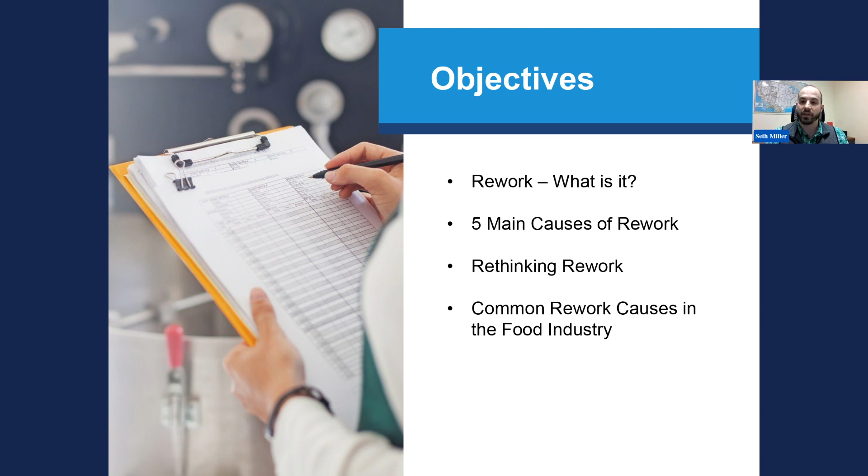So rework, what is it? Rework is really just a general term given to any unincorporated or unused product within a food manufacturing process that's going to require additional work or processing to make that product sellable for you. There are infinite causes of rework, but they can be lumped into 5 main groups.

First being issues with supplies or ingredients, so supplier-related holds that could cause rework for you. Second, any innate rework to a manufacturing process, or something that is a natural part of the process. Third would be a mechanical failure or malfunction of equipment that could potentially put foreign material over a product contact surface. Going fourth, more generally, foreign material found in the product could be anything outside of the mechanical break realm. And then finally, a failed or missed quality check that would result in needing to rework the product back through the quality system.

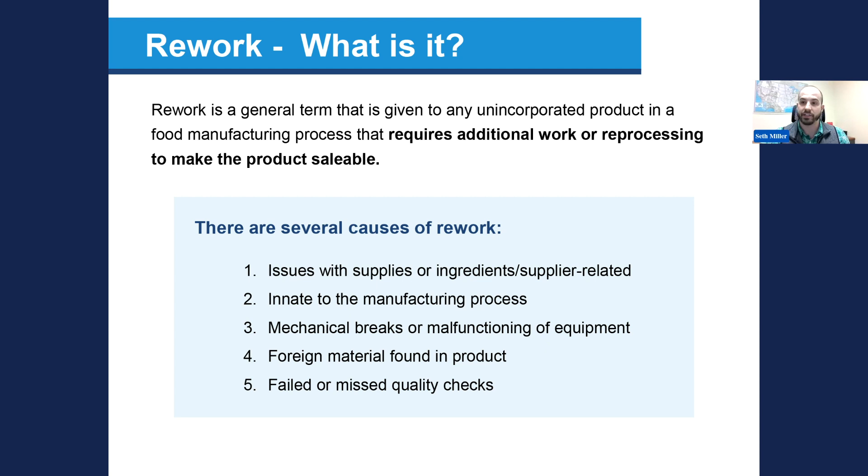So moving right into it, the 5 main causes of rework with more detail. A supplier-caused rework or hold, this could be due to any ingredient or packaging material that is out of spec or contaminated. So this could be very easily solved if you were notified right away. Where the concern comes in is if you weren't notified right away and you found out that you had out-of-spec material from your supplier after you already used the supplies or ingredients. So what would you do then?

Second, talking about rework that is a natural part of the manufacturing process. This is rework that's just part of the process, something you're dealing with day in and day out. Depending on what the product is and what you're making will really determine the outcome of this style of rework. Given the example of utilizing a slicer in the meat industry, where you have a gripper that grabs the butt end of the loaf and then feeds it to the slicer, you have a good chunk of meat left over that turns into rework. That same thing happens within the cheese industry with that same piece of equipment. But in the cheese industry, that rework is very easily consumed in shredded cheese or able to melt back into the process.

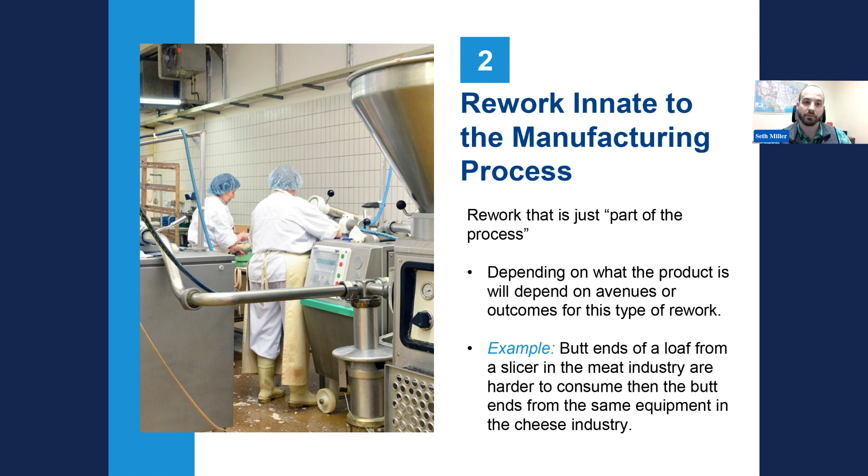Whereas in the meat industry, it's much harder to use. Third, let's talk about mechanical and equipment failures. So when a piece of machinery breaks and could potentially put foreign material into your product,

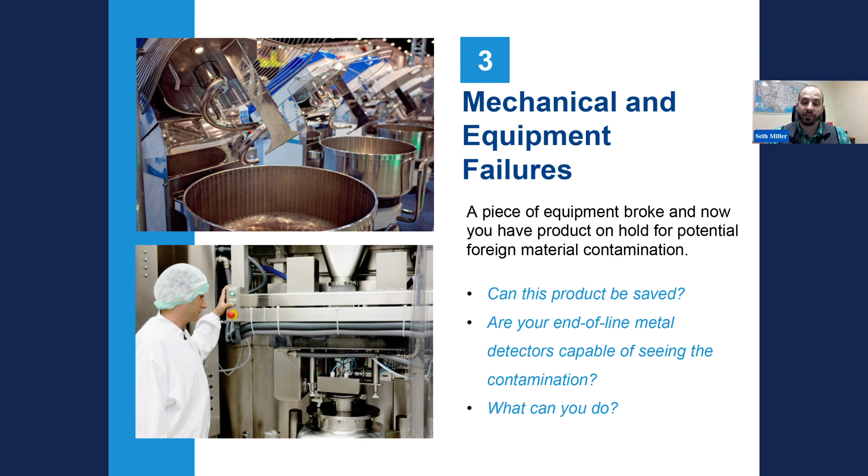how can this product be saved? Do you have end of the line detection? Is it possible to see all of the contaminants that could be in your product? If so, what is the detection level? And what do you do next?

Moving on to the fourth category of foreign material, there are countless sources of foreign material outside of mechanical failures for all of our processes. It can be from human error to just anything from packaging materials getting into your product. So think of human error or tools being left online, as well as PPE gone broken or missing, bone from protein processing being left in something that is considered boneless, or think about glass in the bottling industry.

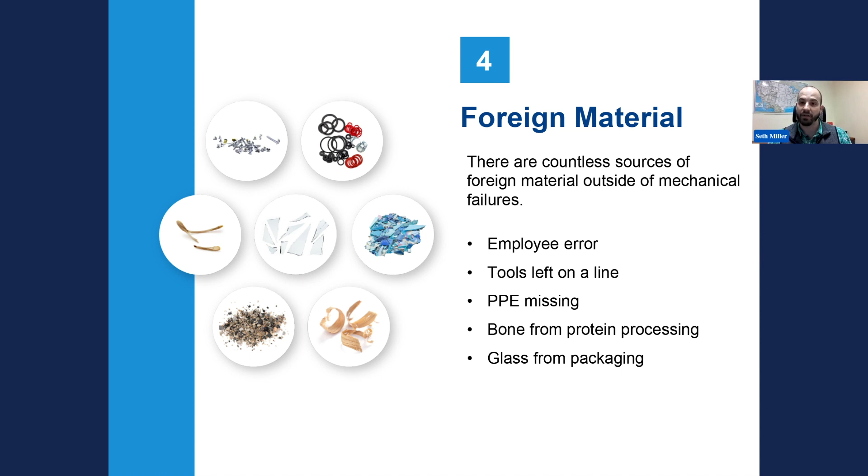If one of the bottles breaks, how do you verify that there's not glass in any of the surrounding containers?

Then the last category we like to talk about today is going to be failed or missed quality checks. A failed or missed quality check can result in many things, but mostly it'll result in a hold for you, on which the product will need to be reworked or at least rechecked to validate that your process is safe. So if it's a CCP failure within your HACCP plan, very serious hold that will require it to be ran back through the CCP if possible.

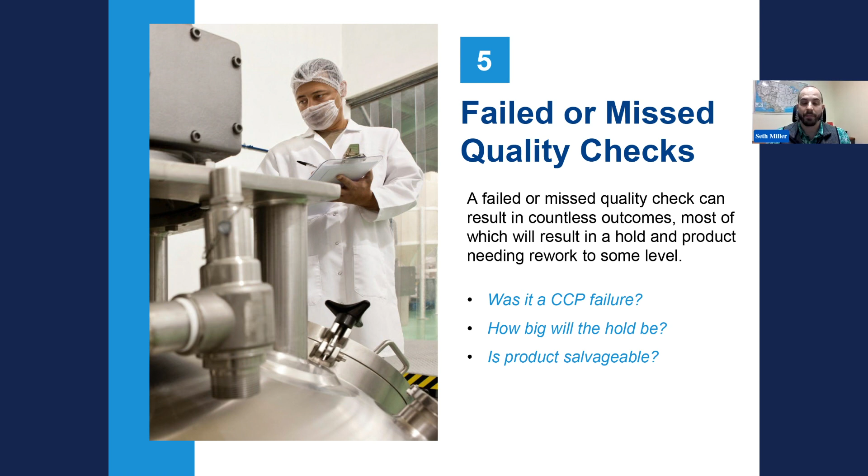Finding the bookends on this and determining how big of a hold might be easier than any of the previous examples we talked about, being that you can go from good check to good check, but then understanding what is your risk and if the product is salvageable.

Next, I would like to turn it over to Suzanne to talk about rethinking rework and the process of foreign material. Thanks, Seth. You did a great job of setting that up, all the reasons why we might do rework. But as Joe mentioned in the intro, we're going to focus today on foreign material, which is certainly cause for concern for all of us in our various industries.

So before we really get into the meat of the rework, let's level set on a little bit of terminology. So there's two reasons why we might find ourselves in a foreign material situation. The first one is an event.

This is exactly what it sounds like. Something happens in the process. Likely it's a known something that causes concern that you might have introduced a contaminant into the product. Examples of this might include some type of malfunction. Maybe you've ground something up in your process, lost personal protective equipment. It could be any one of a number of things.

The alternate is a simple finding. And so this is when foreign material is just simply discovered in the process. It's, I like to call it, it's either a stumble on or an I spy type of situation where you found something in your product, or maybe your customer has found something in your product.

We've got, of course, a variety of exclusion devices in most of our processes. And so I would say when you have a finding at that exclusion device, it's not necessarily indicative of an event. It's not necessarily indicative of a finding. It may just be that that's why you have it in place to collect any incidental things that pass through your process for whatever reason. It's functioning as it's supposed to.

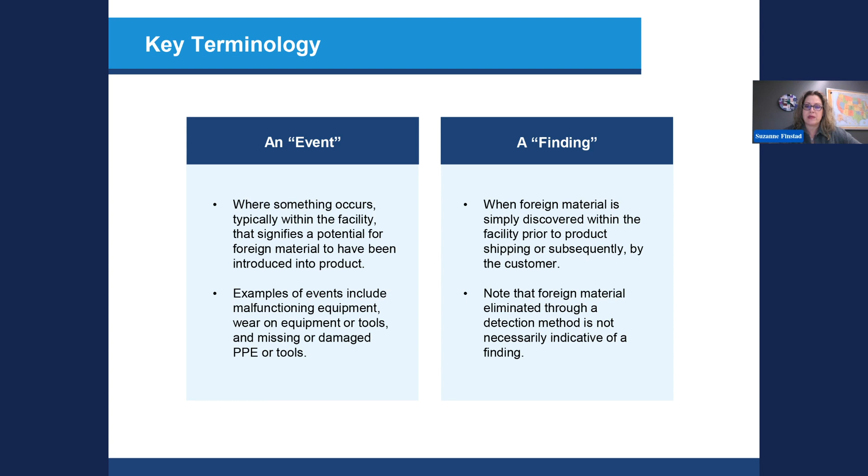However, recognize that there's a crossover point where you have enough of those little findings that may indicate to you that you're in the middle of an event. And so when we think about we've had an incident, whether it's an event or a finding, what makes the difference between spiraling out of control, maybe getting into a really public, unfortunate event for our companies, or good control of the situation, it's really how you respond in the moment. So we're going to spend some time talking about that.

So the first thing that you want to do is control the product. And I'd recommend that you cast a wide net, you may want to overkill on this one. It's certainly much easier to release product on the back end than it is to try to get your arms around stuff that's gotten away from you.

So that's number one. You also, if you don't know what the cause of your situation is, you want to consider all of the components of the product. So anything that went into it, whether that's food or whether it's not food, may be a source for the situation that we have. Consider all of the possibilities, which might include missing tools, parts, personal protective equipment, the unfortunate intentional act.

We hope that doesn't happen, but it's a possibility in our businesses, whether it's an isolated finding or a systemic situation. Lotting really is the key to this, because you want to make sure you've captured enough material to really contain the problem.

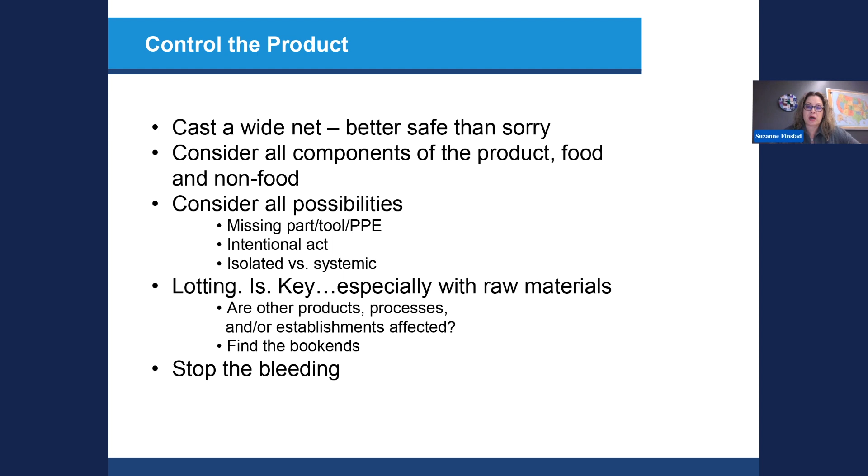And then you really want to find the bookends. When did this start? When did this stop? And stop the bleeding. You want to really recognize the danger in continuing to produce suspect product. You're really just compounding your problem at that point.

Diving deeper into finding the bookends and how we might do that, you first need to consider whether you know when the incident occurred or when it could have occurred. Timing is important. What do you know versus what do you not know? And what might be able to help you know what you know?

Could you use video monitoring? Is that available where you can go back and review the process and determine exactly what happened? Do you have equipment checks that you can refer to that would tell you what that equipment's integrity was and when? Maybe employee interviews - I promise you, no one knows more about what's going on the processing floor than the people actually doing the work.

Think about your process timing, start to finish, whether you're batching, cleanup to cleanup, whatever that looks like for you. You want to know how long it takes for material to flow through your process so that can help you capture what the affected lot might be.

And then consider any catch or collection points, because we're talking today about something that happens in the moment and the rework associated with that. But you might have rework for different reasons coming off your process at any point in time, and you don't want to let that get away.

And then if all else fails and you don't know, if you can't answer any of the above questions, back to the last acceptable check is always a pretty safe bet.

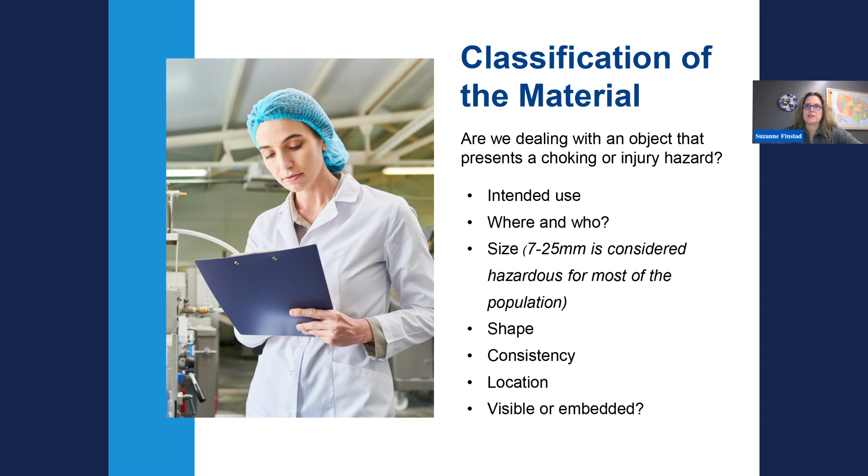The main thing here is really to emphasize the importance of keeping control of any hazardous material and then applying the appropriate response or disposition to that material. When we think about the disposition, this is really the third component of the response.

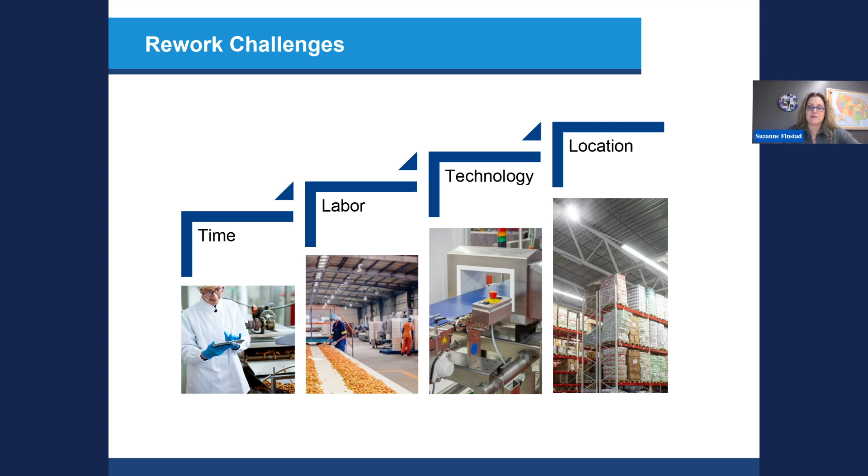Let's take a deeper dive into each of these, starting with time. So you have this rework - I would guess that most of our businesses, I know mine does, runs off of a production schedule. We have orders that we're working to, we know what we're trying to produce, and someone is determining when we're going to produce those things. It typically doesn't account for time baked in for us to start over and retry something that we've already produced.

Additionally, thinking about our customer expectations, I know most of my customers have expectations that the product they order is going to be delivered on time in full. So we disappoint our customers when we can't meet that schedule. Factored into both of those things, what's the reasonable speed that you can conduct this rework in your facility, in consideration of whatever that production schedule is, paired up with the customer expectations for when they're going to receive the product. So that's number one, time.

That takes us to labor, being the next piece. How complicated is this rework process going to be in your location? Let's assume you've got the ability to do it, maybe in-house - how complicated is it going to be? Do you have the labor to do it? Back to consideration of that production schedule, if the answer is we'll have to do this rework over the weekend, 6th and 7th day work, whatever that is outside the schedule, then what's that cost going to be? And is the juice worth the squeeze to try to rework it yourself?

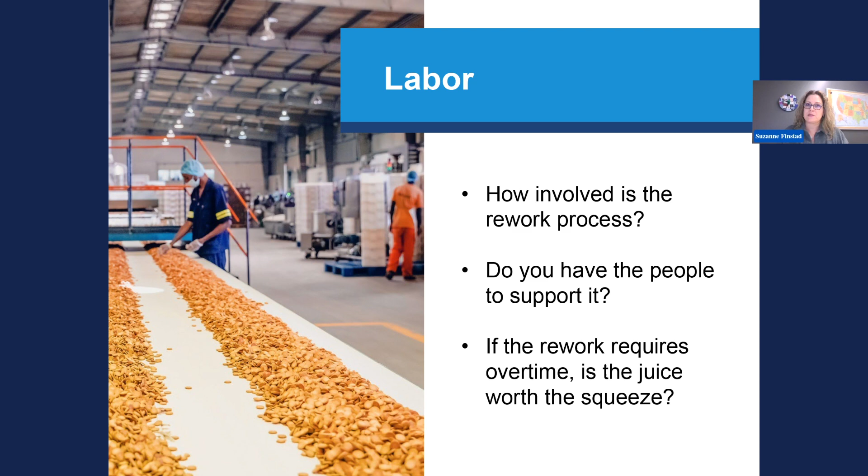Next piece would be technology. When we talk about technology, we're obviously assuming that you're not going to go with manual screening or sorting, reliant on the human eye. There are a lot of possibilities there.

Maybe you've got magnets, filters, screens, metal detection, hyperspectral imaging, X-ray. I think the important consideration here is what are you looking for, and what's the ability of whatever you're using for that technology to detect what that thing is. So just because you've got this technology online, there are a whole lot of factors that influence detectability of materials, and all of those need to be followed up on to make sure that what you're trying to do will actually accomplish the end result.

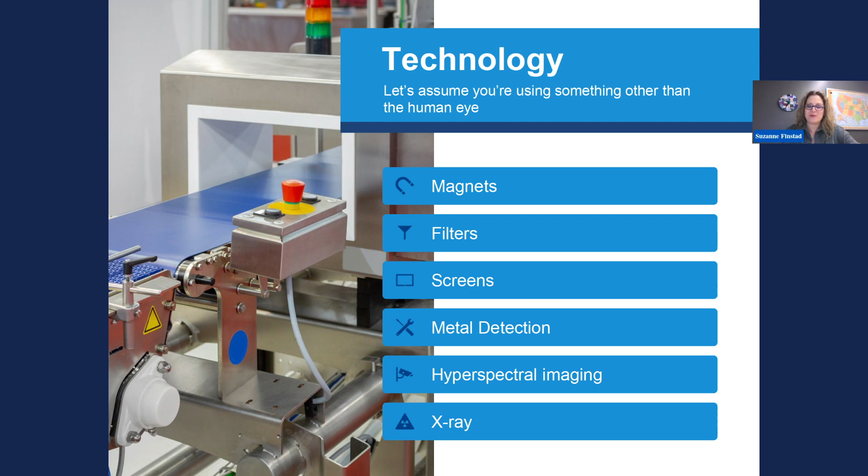We could probably spend a whole other hour talking about those specifics, but we won't belabor that here. Just know that that's an important piece that you need to follow up on. And then finally, location.

So where does this product physically sit? And how easy is it for you to get your arms around it to rework, assuming you're able to, or send it to a third party? Can it be screened, sorted where it is, or does it need to be relocated somewhere else?

If it needs to be relocated, there's probably a cost benefit analysis that goes in there to help make the decision on what the right thing to do is. And then, of course, the pinnacle: what's your comfort level with your ability to keep your arms around the affected product while all of this is going on, and you're working through the rework.

And so with that in mind, we'll transition and talk through some examples of causes of rework. I'll pitch it back over to Seth. All right, thank you, Suzanne.

Now we're going to talk through some common rework causes within the food industry, with an emphasis on foreign material.

So in order to talk foreign material, let's talk about metal detection and a metal detection failure, to be more specific. Metal detectors are a very important part in most HACCP plans. They're the end-of-line CCP for most lines within the food industry. So whether it's a missed check or a metal detector failure, one thing can be certain for sure: you'll have

product on hold. With this failure, though, you'll have a pretty easy set of bookends. You know when your last good check was, and you know when your failure happened, pretty much instantaneously.

So what are the options that you have when you have a metal detector go down, or you missed a metal detector check? Most production facilities don't have an extra line just laying around, or an extra metal detector that they can wheel that product over to and run it through the extra line. So you've got to utilize the lines that you have.

So that means missed downtime, like Suzanne spoke about, potential delivery issues and being on time with orders, as well as constraining your labor. Another option that you might have, though, is a third-party detection service, where you could send your product to them and they could detect it for you, and then you can continue running on the lines that you have.

I think I would just add to this, Seth brings up an important point that most facilities don't have extra lines just laying around with metal detectors on them. So when you're considering what to do from a rework perspective, you want to make sure that you consider the sensitivity level and the size of the aperture in relation to your product, to make sure that you're doing the right thing, and it's equivalent to or better than what your normal setup is that missed on the first try.

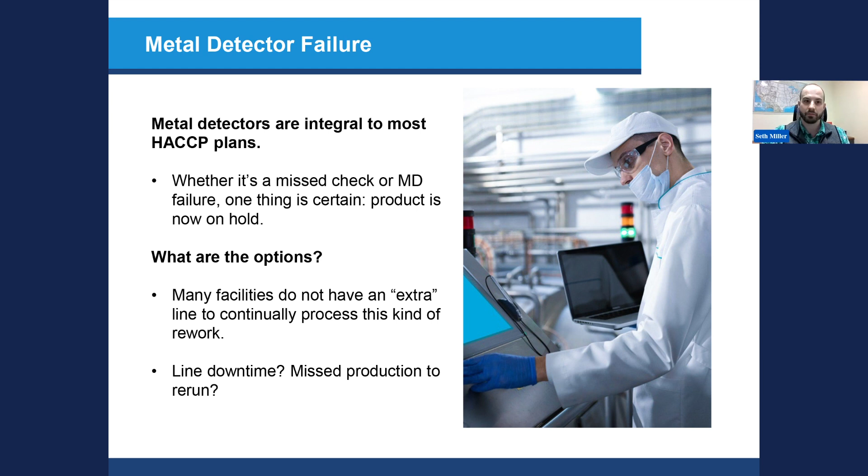Yeah, great point there. Thank you. Moving on to the next slide, let's talk about mechanical failures. Mechanical failures can lead to foreign material contamination and are definitely a growing concern within the industry as we continue to automate processes. You have more machines over your product contact surfaces than ever before.

So once a failure is noticed, let's use the example of a sifter screen being broken and pieces were found missing during a routine check. Once you've found this failure, you have to find your bookends, and you can use the procedure that Suzanne has outlined previously. You're going to assess your risk, and then you're going to create a hold. Once your hold is created, you've got to figure out how we're going to sort through your material to find the broken pieces of sifter screen.

You have a couple options. You can utilize your inline detection, whether that's an inline X-ray or metal detector, and hope that it's able to find all of the missing pieces. You, of course, can add labor and manually sift through that process and see if you can find missing pieces by hand, assuming that they haven't been mixed into the product and embedded.

Of course, you can always throw the product away and start over. Or third, you could utilize a third-party inspection service, so that way you're not taking line downtime or utilizing labor to do a manual sort.

Yeah, and I think the thing that I would add here is, if you're going to try to detect in-house or out of house for that matter, it's really important that you verify that in either case, the detection equipment you're utilizing can detect the thing that you're missing. I think it would be a bad idea to have blind faith in your detection equipment that it's capable of detecting the pieces at whatever size you're missing.

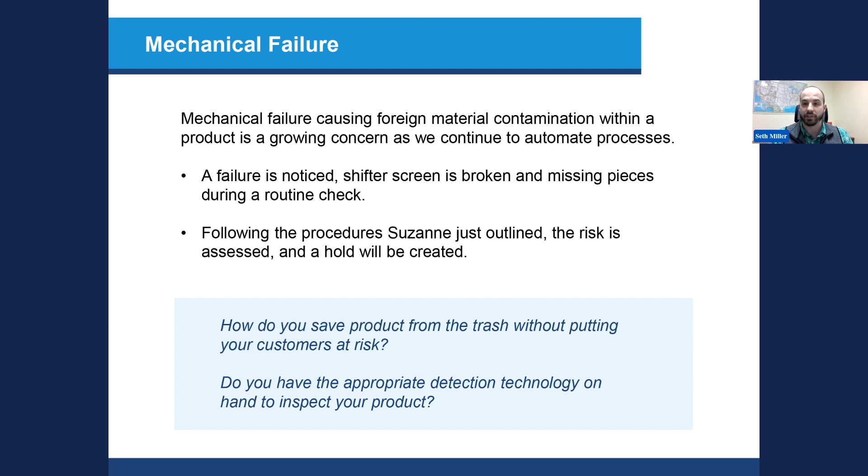Okay, jumping into foreign material, starting out with bone. Bone is not a foreign material from a USDA standard, but when we're talking about boneless meat products, it can present a risk to your customer and can lead to complaints. Bone can be introduced into the meat process at various points, starting with the deboning line. Whether you're utilizing automated deboning or you have personnel physically cutting the bone off the meat, if the blade nicks the bone, you can get some bone in your meat.

Moving on down the process to where you grind and utilize a bone elimination process, if your grind is set up incorrectly or you grind too much bone, sometimes it's too much for the bone eliminator to keep up with. And of course, lastly, if your machinery is not set up appropriately, you miss some plates putting them in, or have the wrong size grind plate in there, it could lead to bone being in your process.

So once you find bone in the product, how do you determine your bookends? Is the entire lot going to be on hold? And if so, what do you do to inspect for that material? As everyone knows, metal detectors do not detect bone. So what options do you have then? Can you do a manual sort? If it is large pieces of bone, that might be possible. Or can you utilize some sort of X-ray technology, whether it's in-house or third party?

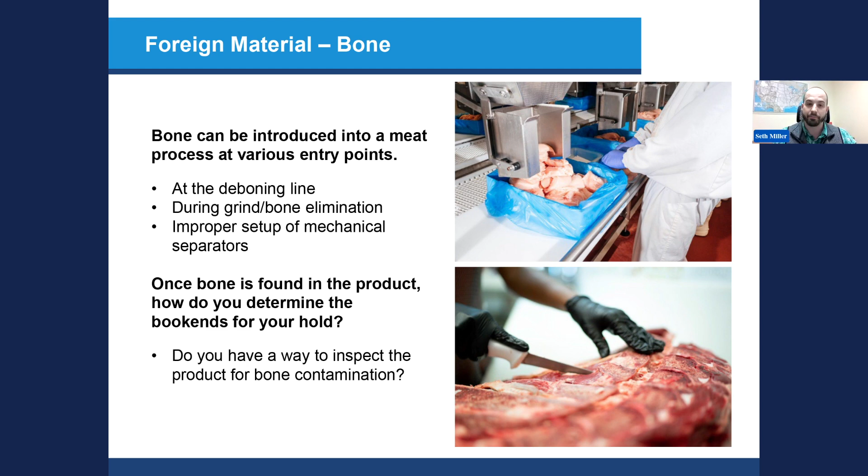Continuing on the vein of foreign material, talking about foreign material that's non-metal. Across the food industry, you have various entry points of non-metal foreign material within your process, whether we're talking about PPE from your operators, simple safety glasses breaking or gone missing, to rubber belting or scraper blades that are an integral part of your process. Each industry can be loaded with a lot of things that the standard metal detector cannot detect.

So when you come across these things, how can you find them when you know you have a foreign material issue that's not metal detectable? First portion would be just manual labor. Can you get people involved to sort through your product to see if you can find this foreign material, or do you have to trash it? What other options do you have? X-ray technology is growing and becoming better, so some of these things can be found through X-ray technology, whether it's in-house or with a third party.

Yeah, and I think I would just reiterate one more time the importance of making sure the equipment you're using is capable of detecting whatever you're looking for. The other thing I would add is just a caution with people doing the rework, because people all come with attention spans that may or may not be very long. Even the most attentive person kind of glosses over after a period of time looking at what feels like the same thing. Maybe there's also a method of, whether you can feel it in handling the product, if that's even possible. But there's a lot of pitfalls in here. The main thing would be, can you actually detect whatever it is that you're looking for?

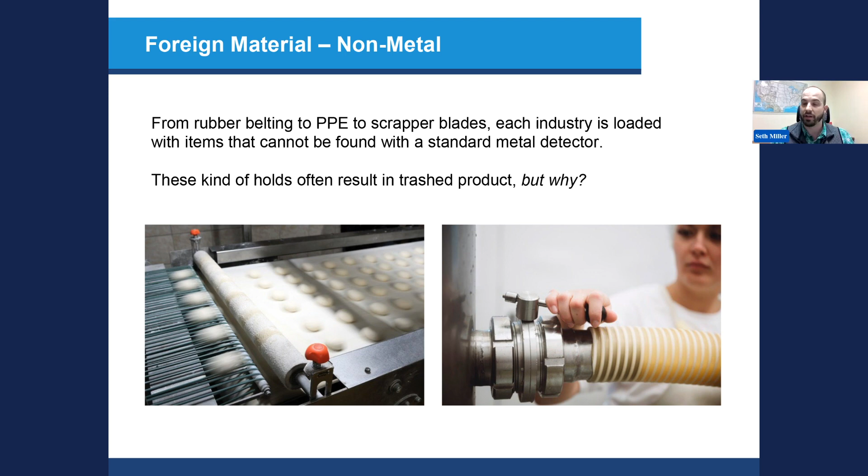I think the size of what you're looking for adds to your point there as well. If it's something really small that it's really hard to see, then is manual even an option for you?

The last thing I'd like to touch on from a foreign material event would be metal. The vast majority of all of our production lines are made with a lot of stainless steel. It's a favorite with quality departments and engineering teams across the industry because it's easy to clean, corrosion resistant to the chemicals used to ensure cleanliness, as well as being a very mechanically strong material.

Using an example of during a routine check that you find metal rubbing on metal, creating small metal flakes and metal dust. This could lead to a very large hold, specifically if it's not a routinely checked area, or in my mind, you find that pre-op. So if you're doing a pre-op and you find that you've had a lot of metal rubbing that could potentially cause some contamination, how often are you looking at that area?

Could be once a week, could be once a day. That could lead to a very large hold in terms of creating your bookends to determine the last time it was a good piece of equipment versus the time you found that it was rubbing.

The first thing you need to determine now, after you've established a hold, would be, is your standard end-of-line metal detector capable of seeing what you're looking for? Or is this going to be too small of a metal flake for it to see? At this point you're left with two options: either increase your technology and utilize something better, like X-ray, or trash the product.

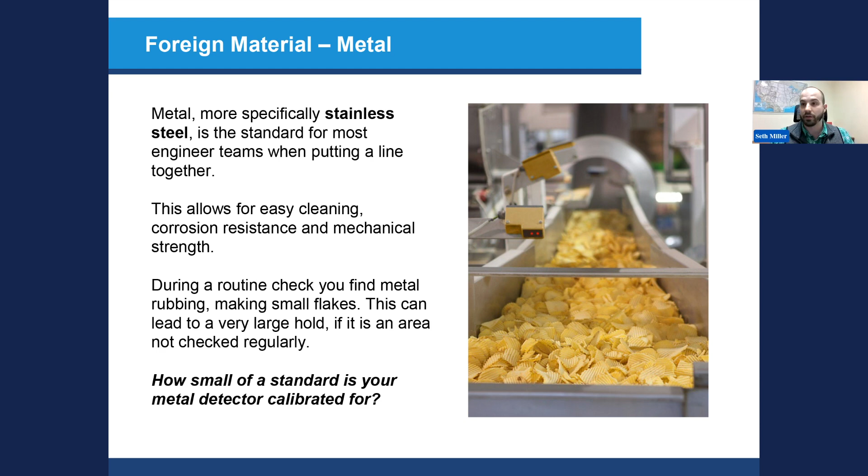The last example I want to talk about that could be a result of foreign material, or just a lack of knowledge if it's foreign material free, would be missing a CCP check. We've all had operators that have gotten busy and either missed a check completely or have gone over the time limit stated within your HACCP plan.

So when this happens, of course, we're going to have a hold generated and some rework is going to come out of that hold. Going back to the first example of a metal detector failure, would you have free line time to be able to rerun this product back through the CCP that you missed a check on? And is it possible to manually do this offline, or do you have to utilize your line time? Not to beat a dead horse, but not everyone has a spare line to be able to do this again.

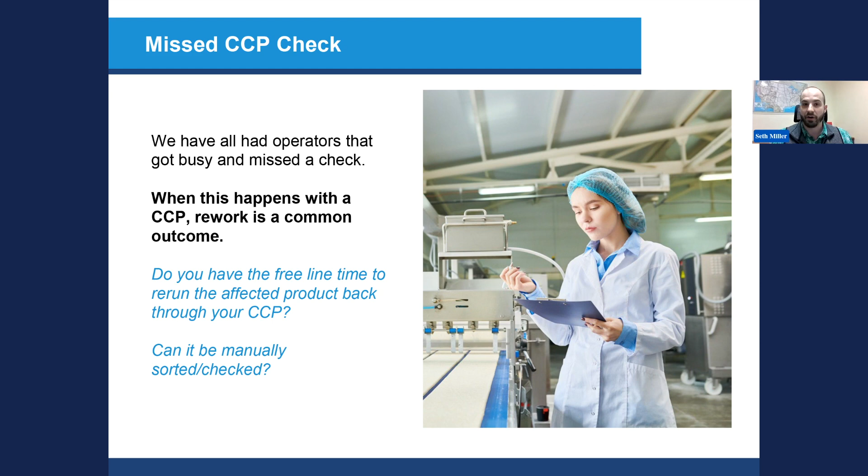Again, the other option could be, of course, a third-party checking.

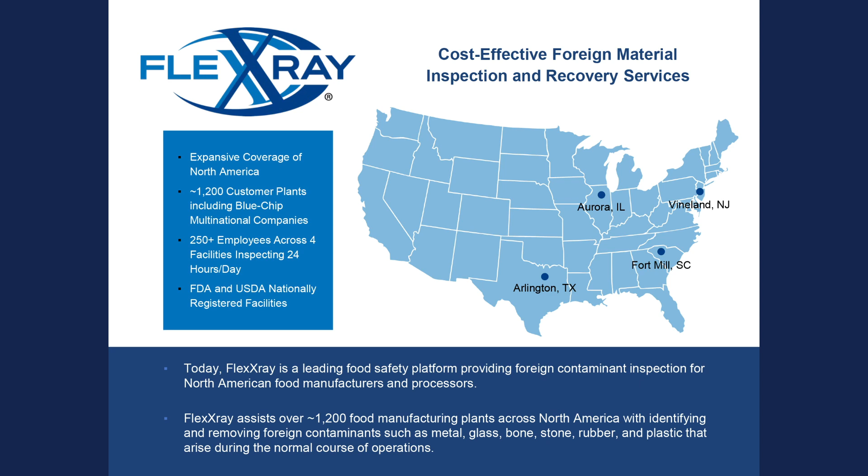Thank you so much, William, and thank you all for your attention to today's presentation. Just going through our Q&A briefly here at the end. So the first question that we have, and Seth, we'll start with your answer to this, is: when an issue is identified during processing, would it be best to hold the entire production for re-inspection?

Yeah, so I think this would depend on the issue that was identified. Most often not, the entire production run does not need to be held if it's a one-off instance. But like Suzanne gave earlier, we've got to identify bookends. So the most important piece is, when do you know the problem started? And if you don't know that, we've got to figure out when the problem did start to be able to identify how much product needs to go on hold.

Absolutely. Suzanne, anything to add to that? Yeah, I think Seth covered it pretty well. I would just say I think your investigation drives this. So sometimes, as I said, you may want to hold more and then you can release along the way. It's a lot easier to do that on the front end than to come back behind and try to gather up what you can.